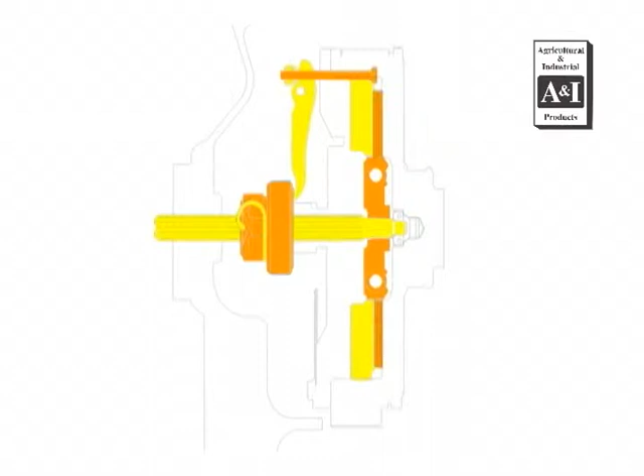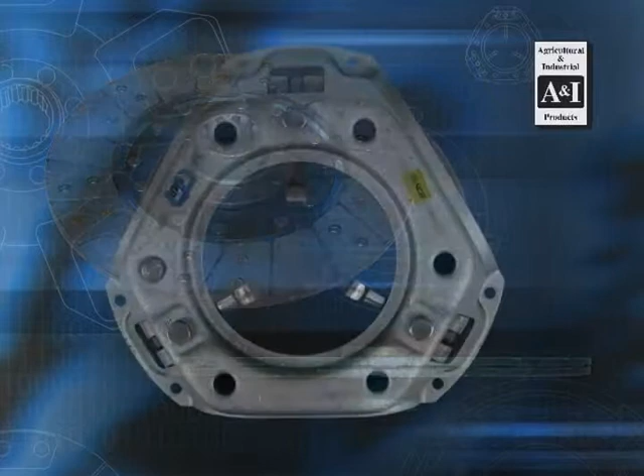Single disc clutch. The single disc clutch is the most common of all clutch designs. This design is used in automotive, industrial, agricultural, as well as many recreational vehicles. It is a very simple design, one disc with friction material and a pressure plate assembly. Pressure is applied to the disc via springs pressing against a plate and is released by simple lever action. A variation of this style clutch has a hub in the pressure plate that transmits power to drive the PTO. Another variation of the single disc clutch is a diaphragm style pressure plate.

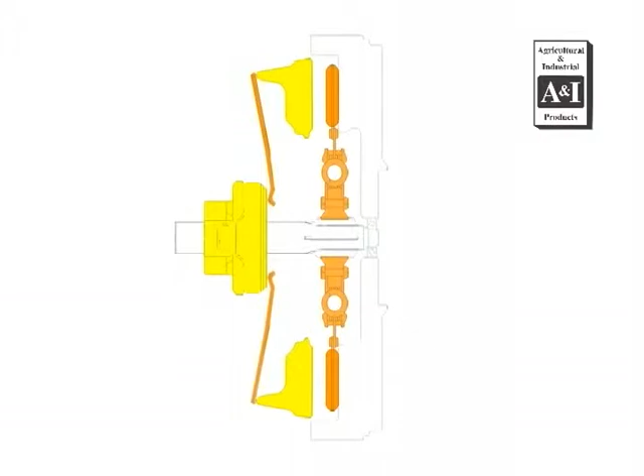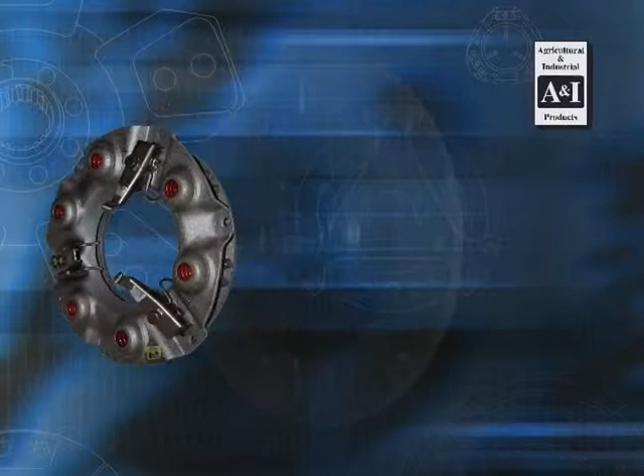Multiple disc clutch. The multiple disc clutch operates on the same concept as a single disc. The advantage this design has over a single disc is a greater surface area due to the fact that it has more driving discs. This enables the clutch to have more pulling power before it slips. Multiple disc setups also dissipate heat faster. This design requires plates or floating discs between the driving discs.

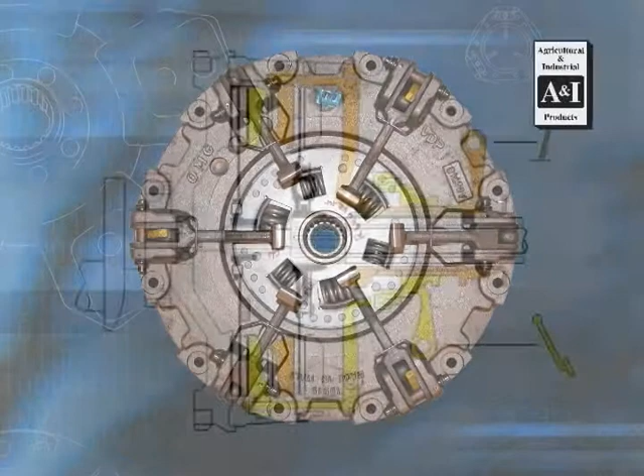Dual stage clutch. A dual stage clutch has two clutch discs: one disc to transmit power to the transmission and another disc that drives the PTO. On some applications, these work independent of each other. You can determine the independent PTO by the different length release levers. On other applications, the PTO is disengaged depending on how far the clutch pedal is depressed. These levers will appear closer to equal length.

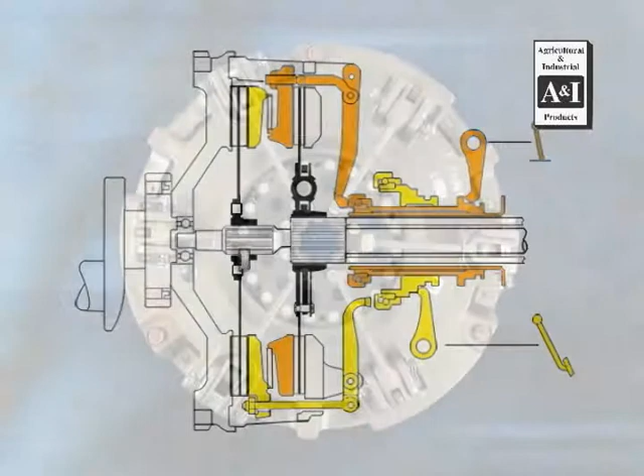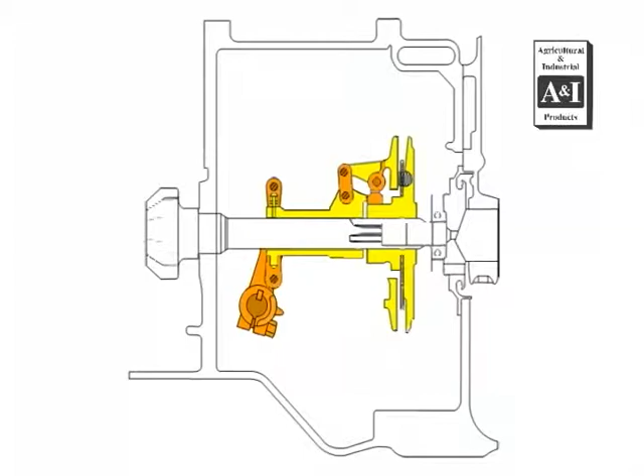Another style is the over-center clutch. This style clutch does not have springs that apply pressure. Pressure for the plate is applied through mechanical linkage that snaps over center to lock in the clutch disc. This type of clutch was popular in some older tractors and combines and is still very popular for use on stationary engines and other power unit applications.

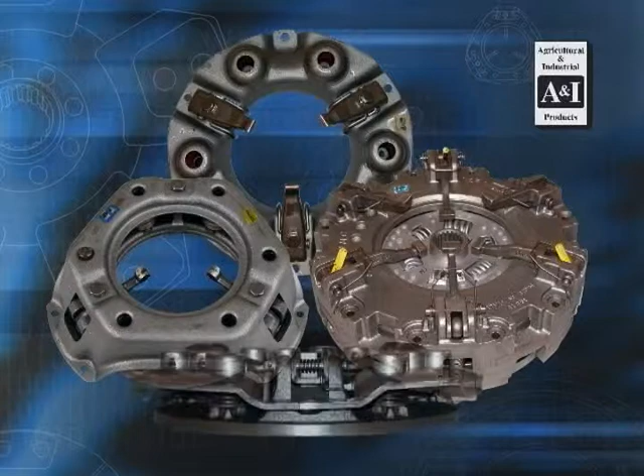Now that we know the different styles of cover assemblies, let's talk about the other important information we need to know. First, measure the outside diameter of the cast plate of the pressure plate. Make a mental note of what style levers are used. Some applications use a stamped lever, and other styles use a forged style lever.

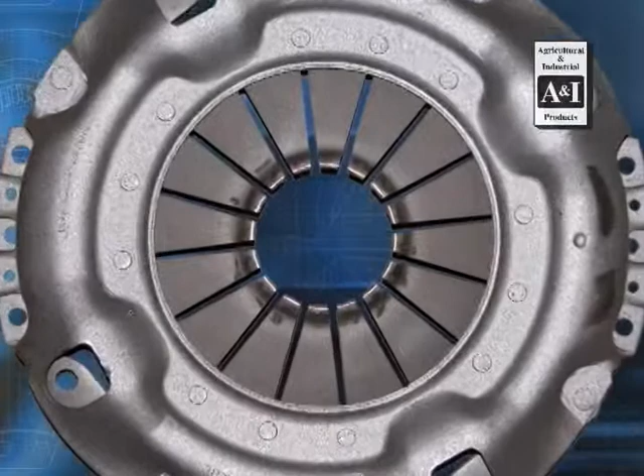If you are working on an application equipped with a diaphragm style pressure plate, it will look similar to this. Another possibility is to have a bearing plate attached to the levers. For some applications, it is necessary to know the number of springs used in the pressure plate. For others, it may be important to know the bolt pattern, where it bolts to the flywheel. If the cover assembly you are working with includes a hub to drive a shaft, count the number of splines and measure the inside diameter of this hub.